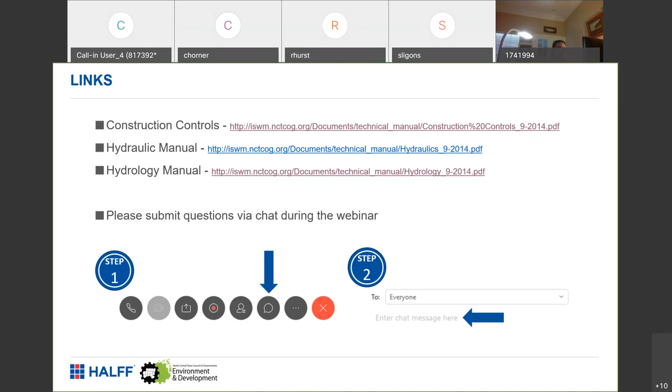During this webinar, we will cover the summary of the online survey results, address the feedback received regarding the construction controls technical manual, the hydrology and hydraulics technical manual, iSWM implementation and enforcement, as well as the site development controls technical manual. Then we'll wrap it all up with questions and next steps. Now I'm going to mute myself and turn it over to Ashley.

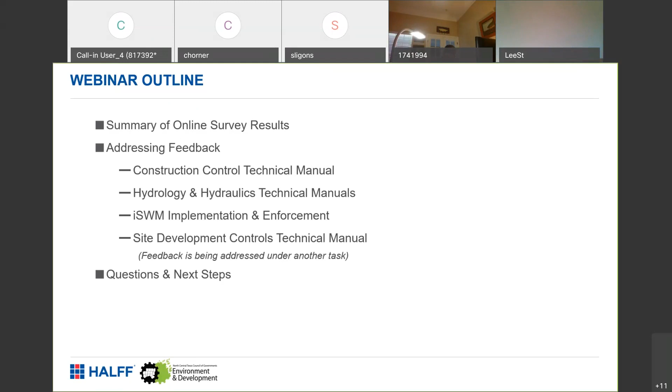Thanks, Sydney. As Sydney mentioned, this is all part of a task under the iSWM Implementation Subcommittee. In order to get this task started, a survey was sent out, and I'm going to discuss that at a high level before getting into the specific technical comments received. The survey was sent out at the beginning of December, and participants had until the end of January to respond. The survey went out to those who have adopted the iSWM program to get an idea of the things that are working for these communities and what hasn't been working.

Unfortunately, the number of responses to the survey was on the low end with 5 respondents. This survey also gave iSWM communities an opportunity to provide open-ended technical feedback, which will be covered for the bulk of the presentation today. But before getting into the specific technical comments, I'm going to briefly go over the responses to the general questions that were asked in this survey.

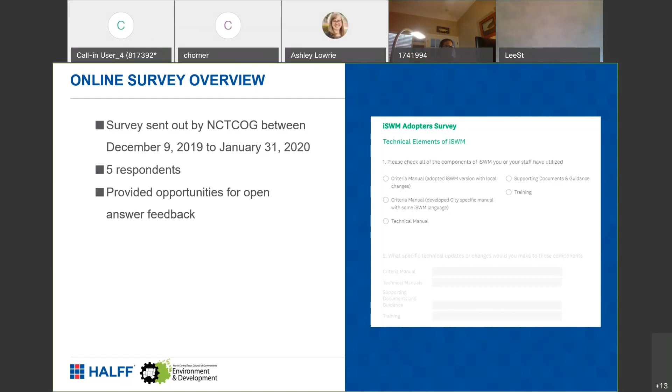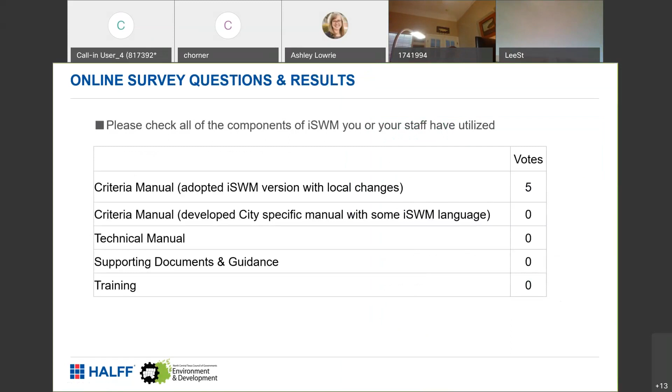The first question was to check all components of iSWM that the staff of that community uses. The most utilized component was the criteria manual, and by extension, the technical manuals. It appears respondents use the iSWM criteria manual with local changes, mainly. The second question was, where do you see the greatest need for training and clarification in order to clarify iSWM requirements? Most said the greatest need was developers and designers.

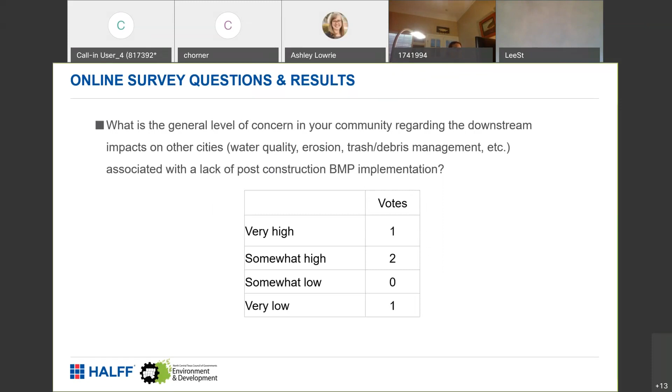What were the greatest challenges implementing or enforcing iSWM, or have they had challenges implementing or enforcing iSWM? The results were mixed, but both saying that no, they have not had challenges. The next question asked how concerned their community is with downstream impacts, including water quality and erosion, and the most common response was somewhat high, on a range of very high to very low. The last general question asked if iSWM has helped the community achieve their goals, and the 4 that responded said yes.

Now we're going to get into the specific technical questions submitted as part of the survey. For each comment we talk about today, I'm going to state what the comment was that was brought to our attention and the recommendation to hopefully appropriately address it. These recommendations do not mean the iSWM technical manuals will be modified at this time, but it is what will be recommended to the iSWM implementation subcommittee, and it will be up to COG and the subcommittee to determine if the recommendations are implemented.

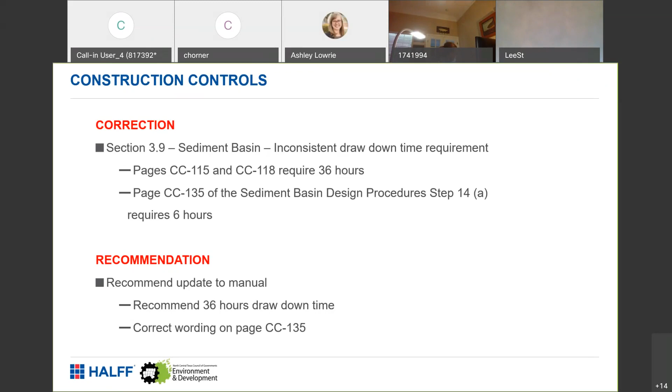The next comment was to include wording for the orifice outlet of a sediment basin, that it should be no less than 3 inches in diameter to prevent clogging issues. The recommendation for this is that an update doesn't need to be added to the manual, because on page 135, it states that the diameter of the dewatering orifice should never be less than 3 inches in order to prevent clogging by soil or debris. So this wording may have been added after this comment was received, but I would need COG to confirm that, since obviously I didn't make the specific change.

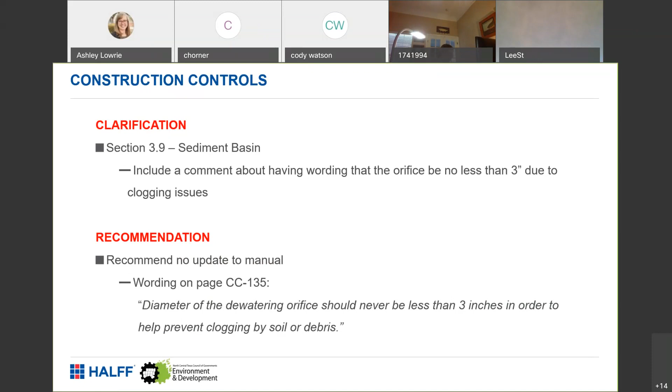Moving right along, also within the sediment basin design procedures, specifically in step 1, the comment was to correct or add a reference to the hydrology technical manual for required volume calculations. To address this comment, we do recommend making a modification to the manual. This section in the construction controls currently refers to section 3.8 in the criteria manual, which is for selecting which stormwater control is appropriate for your site.

It could potentially be assumed if someone reading this sediment basin section of the manual that they have already selected their stormwater control being the sediment basin. So we would recommend removing that reference to the criteria manual section 3.8 and adding a reference to section 1.0 of the hydrology technical manual, and specifically maybe table 1.1, which gives guidance on which hydrologic method is appropriate for the site, and then also directs them to the corresponding section for that methodology. We'll get more into hydrology methods and comments regarding that here in a little bit.

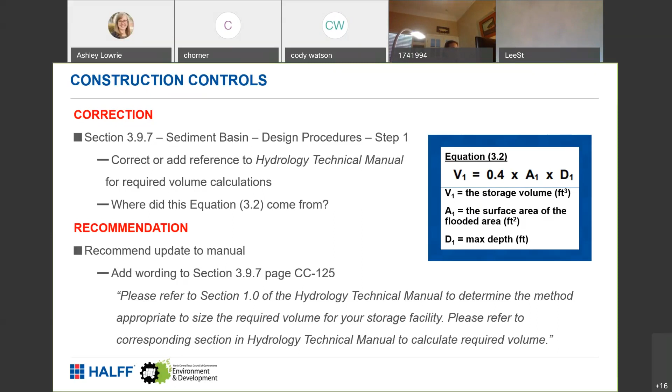Moving on, continuing on with sediment basin, got 2 more comments. The last comment was that the manual needs a better explanation of surface skimmers, and that comment was to hopefully encourage the use of them. They suggested highlighting that surface skimmers can be reusable. In relation to that, a recommendation to remove a perforated riser and the diagram for that was suggested.

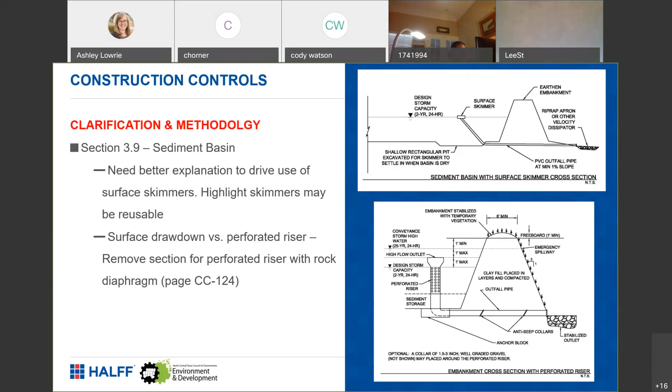You can see the diagram for both of these, the surface skimmer and the perforated riser on the right. The goal of the sediment basin is to capture the muddy water and allow the sediment to settle. The surface skimmer is more efficient because it works from the top down, releasing the cleanest water near the surface, as you can see in the diagrams. For a recommendation, we do recommend adding wording to section 3.9.3 that surface skimmers can be reusable. However, we don't recommend removing the perforated riser diagram - there is a caveat in the manual on page 118 that a perforated riser can be used when surface discharge or surface skimmer is not feasible, and it warns that it has the lowest sediment removal efficiency.

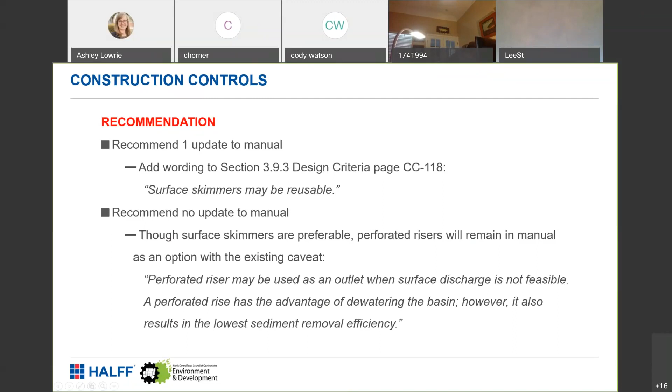I guess a recommendation could be made to make that language more strong, but we don't recommend removing the perforated riser diagram at this time.

All right, so that was the construction controls technical manual comments, and we're going to move on to feedback that was received about the hydrology and hydraulic technical manuals. Hopefully I'm not going too fast.

All right, so the first comment is a pretty straightforward one. In the hydraulic technical manual, section 2.1.3, there was an error found in the formula for a frustum of a pyramid. Currently that equation includes an extra division by 3, and that is incorrect.

The recommendation would be to obviously update that equation, on page 94 in the hydraulic manual. So thank you to whoever caught that error.

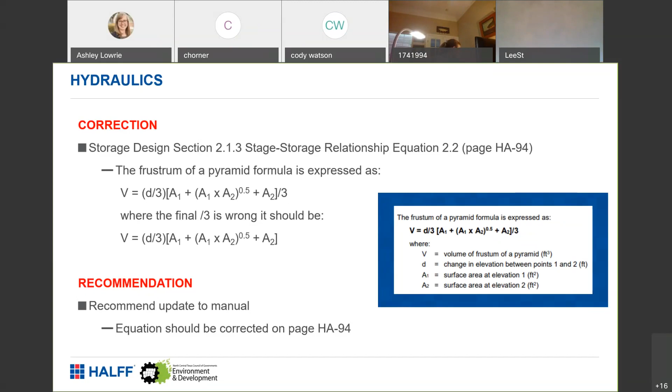All right, so the next comment was that the hydraulic technical manual doesn't include a calculation for an on-grade inlet along a parabolic crown street. Currently the iSWM manual uses HEC 12, FHWA, Federal Highway Administration, and for the inlet calculations it refers to HEC 12.

So for this comment, we do recommend making a modification to the manual. We would recommend adding a reference to the most recent version of the Federal Highway Administration's manual, HEC 22. This does provide calculations for this type of inlet and road cross-section.

And so, whoever made this comment, if I put a link to that document, you can see some screenshots of the information found in the document, but it does walk you through that calculation in section B.3.

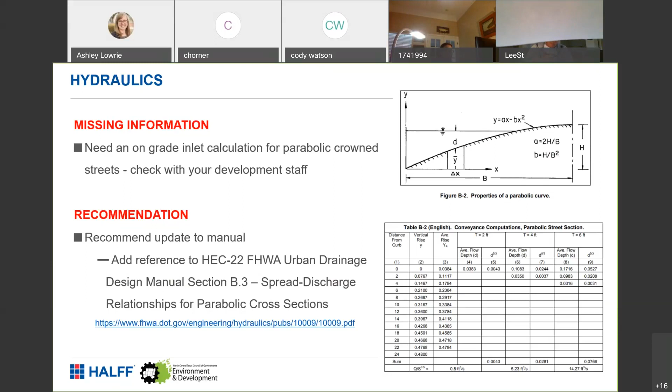Okay, getting back to hydrology and detention sizing. So focusing on the hydrology technical manual.

The first comment was that a more coherent section should be added to the technical manual for detention sizing. There are several hydrologic methodologies included in the technical manual, and there are several options that can be used for detention design, depending on the specifics of the site.

Related to this comment, it was followed by a question regarding the modified rational method for detention design. Is it okay to use the modified rational method for any detention design, or just for preliminary design and approximation?

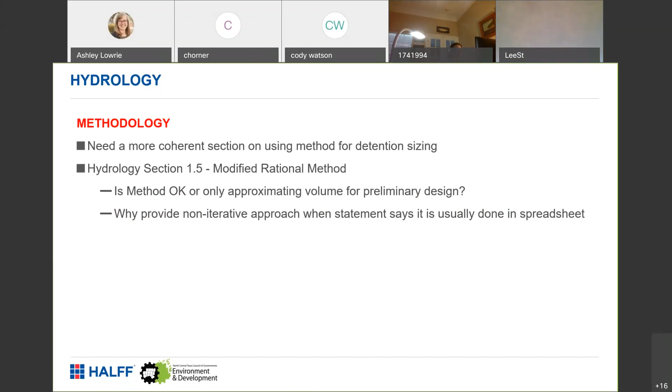So for the recommendation on this, to address this comment, we recommend no update to the technical manual. In section 1.0 of the hydrology manual, table 1.1 states what hydrology methodologies can be used for storage facilities design.

Table 1.2 determines the limits of those methodologies. You can see table 1.1 in the screenshot: SCS method, modified rational, Snyder's unit hydrograph, and water quality volume calculation.

The technical manual states that the modified rational method can be used for storage facility design for drainage areas of 200 acres or less. I thought in order to address this comment, it was worth mentioning on page 7 that it states—

—the normal use of the modified rational method significantly underpredicts detention volumes, but the improved method in section 1.5 corrects this deficiency, and the method can be used for detention design for drainage areas up to 200 acres.

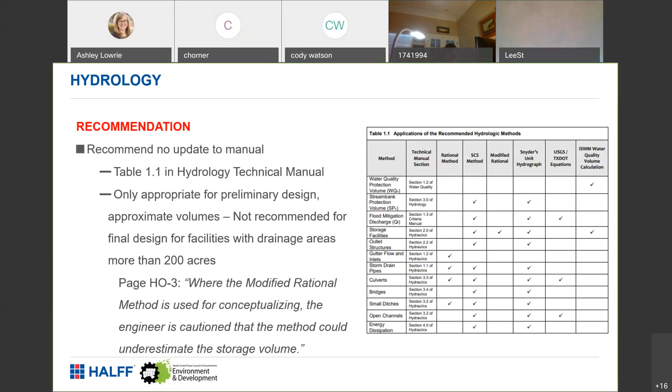As stated, we're addressing technical comments—fixing issues and clarifications throughout the iSWM program. So moving on.

This next comment is probably a known issue to most H&H engineers out there. Related to the previous comment, this points out that the SCS unit hydrograph method peak flows seem very large compared to the rational method, and I think several H&H engineers can confirm that fact.

But for this comment, we also don't recommend an update to this manual. The SCS unit hydrograph method is known for being a conservative approach, but it is used widely throughout the Metroplex and the state. Coming up with an alternative methodology is probably outside the scope of this task.

But I might recommend that this could potentially be brought up during the roundtable discussion at an iSWM implementation subcommittee meeting, to initiate discussion and get others' input on this—if other people have come up with a solution to this or an alternative. But no recommendations for changes to the technical manual are recommended for this comment. All right.

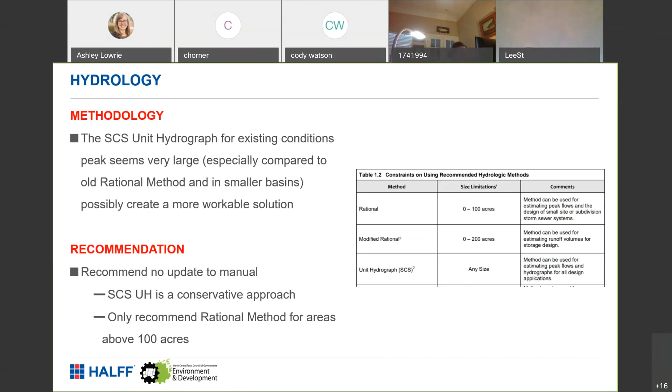I think this is the last comment for the hydrology technical manuals, and it's another methodology question.

So in section 1.3.7, the simplified SCS peak runoff section, the issue was the method as described is not a complete method. Prefer to have a note referring to TR-55 for the full description, and suggest removing this section.

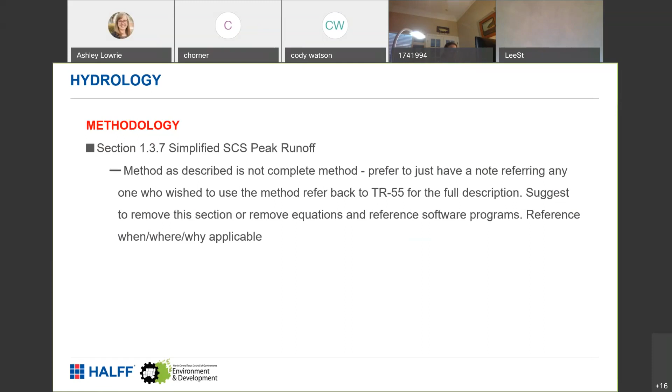So we would recommend an update to the manual to add a note or caveat that the full description, in compliance with the methodology, please refer to the TR55 document. At this time, we wouldn't recommend removing the formulas that are in there, as long as there is a caveat for full methodology. Refer to that document to ensure that they're following and are in full compliance.

As far as where it is applicable, the manual does state that these procedures are applicable to small drainage areas less than 2,000 acres with homogeneous land uses and can be described with a single curve number.

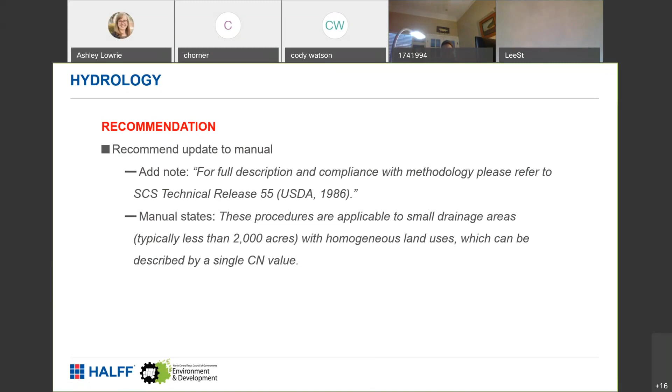Moving on to the third section, which is iSWM implementation and enforcement. There were a couple comments regarding this. A clarification was added to clarify when iSWM applies and when it doesn't.

And what if the property was platted before iSWM was adopted by the municipality? This comment is a clarification, so we don't recommend any changes to the technical manual or to the iSWM program.

Legal nonconforming is a city decision, and wherever this is an issue, you would need to contact the local city where the site is located.

As far as the iSWM program goes, for new developments and redevelopments, iSWM does require discussion during the platting period, and the iSWM program would apply as long as they don't have local changes to the iSWM manual.

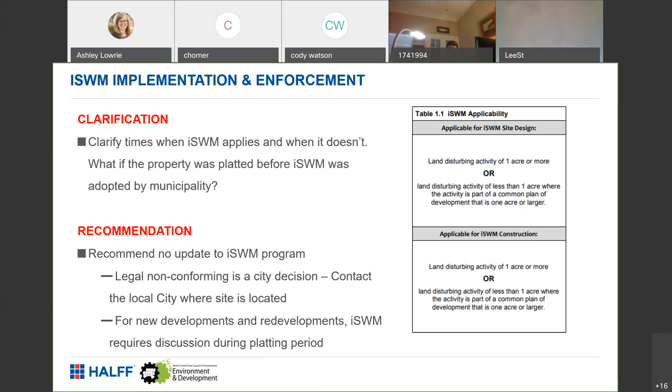And you can see table 1.1 from the criteria manual that states when iSWM is applicable and for which type of sites.

Another concern that was brought up was if developers aren't familiar with the iSWM requirements and the associated costs to comply with them, and related to that, developers and engineers dealing with different local criteria adopted by all the different DFW communities, working in one city and then working in another, and how the criteria might vary. The other comment was about training on the iSWM manual, specifically for a storm drain pipe system.

I think we recommend that the solutions to these concerns could be incorporating these topics into NCTCOG's training agenda. I think they're always looking for opportunities to incorporate needed training into their schedule.

I also wanted to point out that there are existing trainings on the iSWM website that might be helpful regarding these topics. Specifically, there is a presentation from 2014 on the new iSWM implementation approach that went over the changes that went on during the iSWM program in 2014.

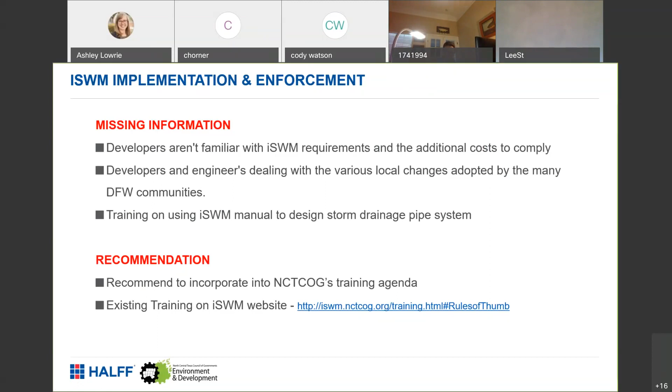All right, so moving on to the Site Development Controls Technical Manual. So we have received - COG has been holding workshops and leading discussions on the Site Development Controls Manual in order to get feedback on that.

There was a workshop held on October 9th of last year, and the PowerPoint is on their website, as well as the workshop that was held on February 5th. Those workshops were specifically just to receive feedback on the Site Development Controls Manual.

And we have received lots of feedback, and we have summarized that into action items. COG is working on implementing some of those recommendations discussed at those workshops. The Site Development Controls Manual is something being worked on underneath another task.

But if you're interested in providing feedback, or seeing what those updates are going to be, please feel free to reach out to our contact information at the end of the presentation, and also look at these workshops that went on and see what was discussed.

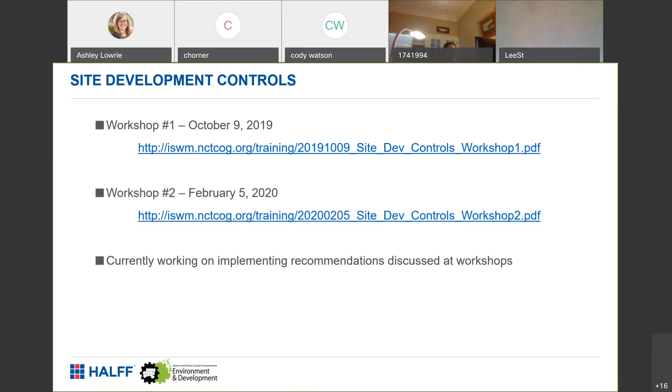And that moves us into the questions section portion of this presentation. Okay, thank you. Thank you, Ashley, for going through that presentation for us.

We did get one comment in the chat box, and it was in regards to the SCS hydrograph. It's from Howard, and he says the issue with this SCS hydrograph method may be conservative, but it results in an extremely large discharge for existing conditions, potentially causing issues for downstream owners, especially in relation to smaller basin sizes. So Ashley and Ben, if you would like to unmute Howard, so if he has any additional comments, he can, and then you guys can go ahead and answer that comment for him.

Oh, he says he doesn't have audio. Okay, never mind. But if you could speak to that, Ashley or Ben. Hey, I'll jump in, this is Ben.

Go for it. Okay, so yeah Howard, I think you're right. I mean that one's been debated for quite a few years on the SCS and rational, and obviously that one fits for both.